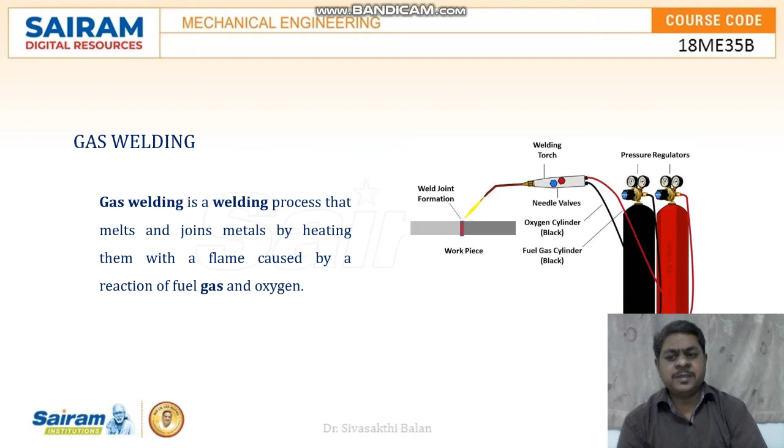In this video, we are going to see about the working principle of gas welding and its applications. Gas welding is a welding process that melts and joins metals by heating them with a flame caused by the reaction of fuel gas and oxygen.

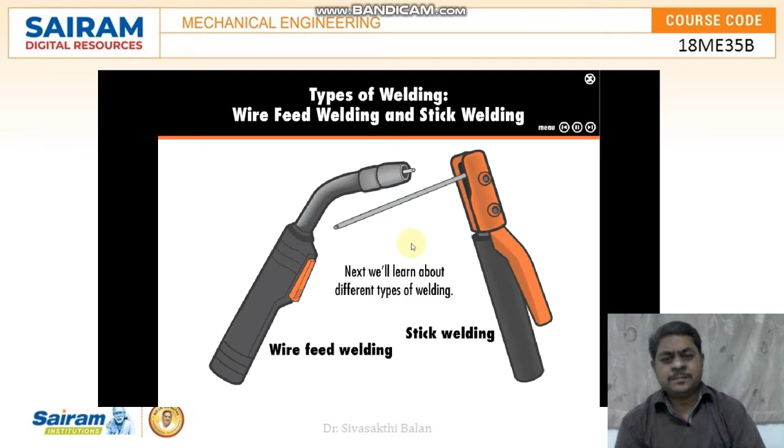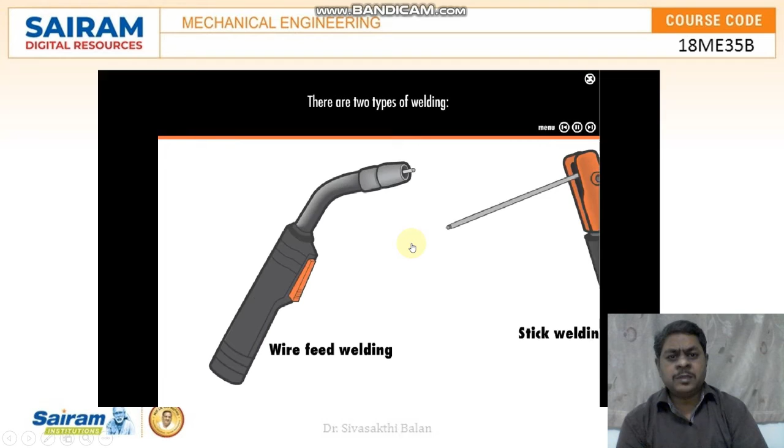Types of welding. Next, we will learn about different types of welding. The type of welding is defined by how the filler material is fed into the welding process. There are two types: wire feed welding and stick welding.

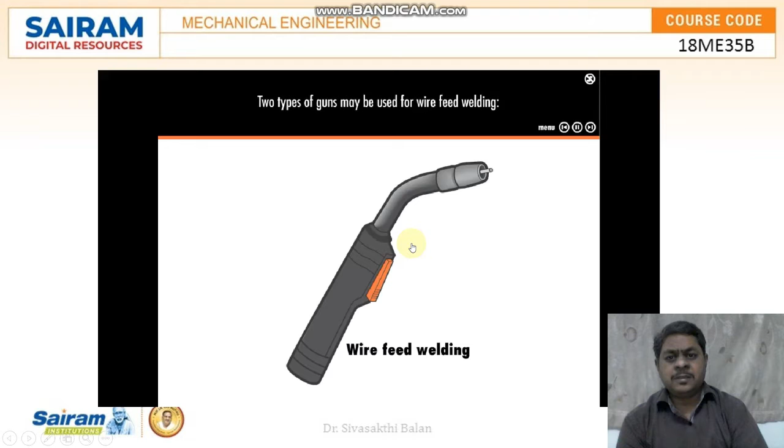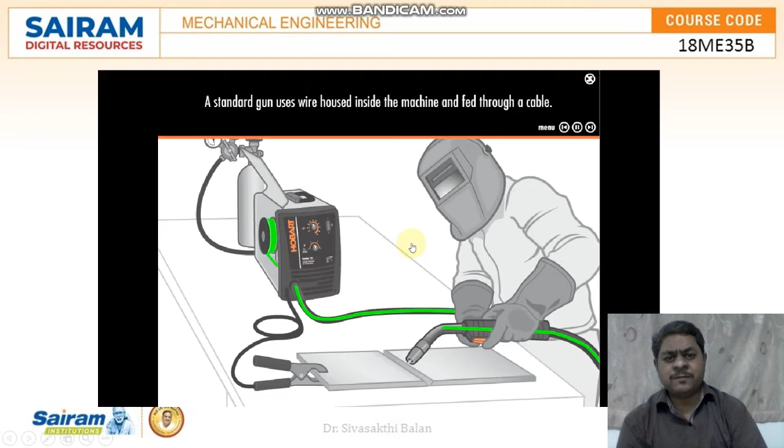Wire feed welding uses a gun to feed the wire into the welding area. Two types of guns may be used: a standard gun and a spool gun. A standard gun uses wire housed inside the machine and fed through the cable. A spool gun uses wire housed on the gun itself.

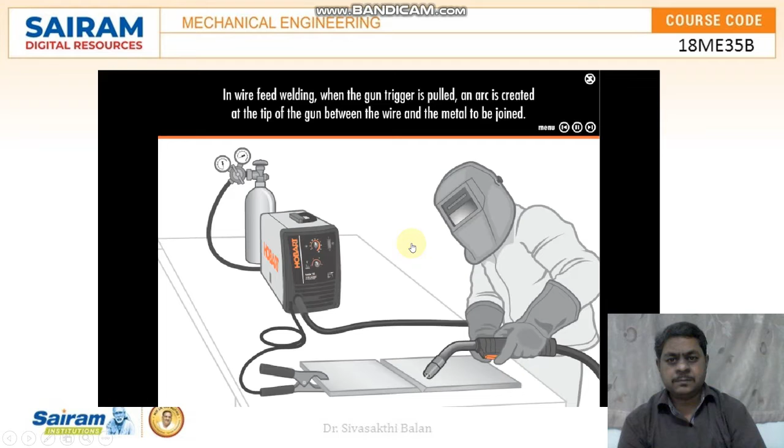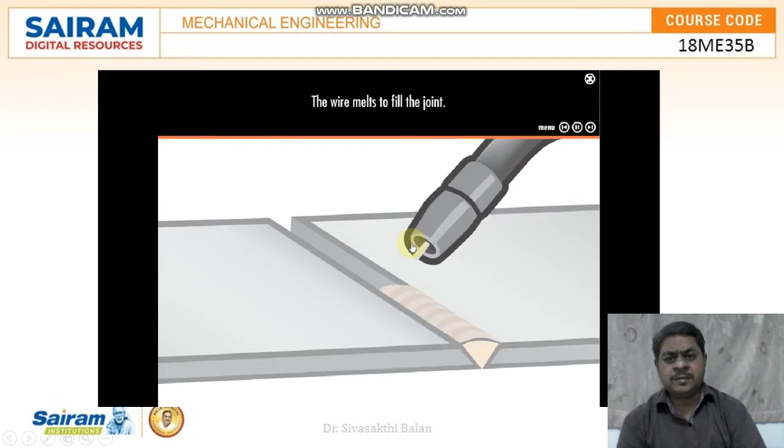In wire feed welding, when the gun trigger is pulled, an arc is created at the tip of the gun between the wire and the metal to be welded. The wire melts to fill the joint. Pulling the trigger releases more wire into the welding area.

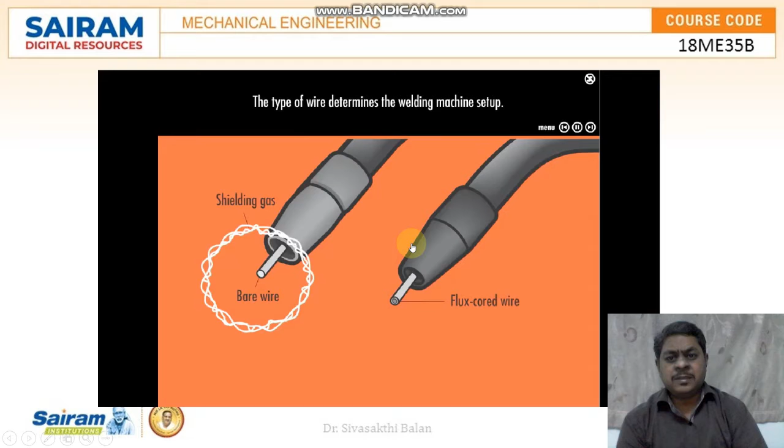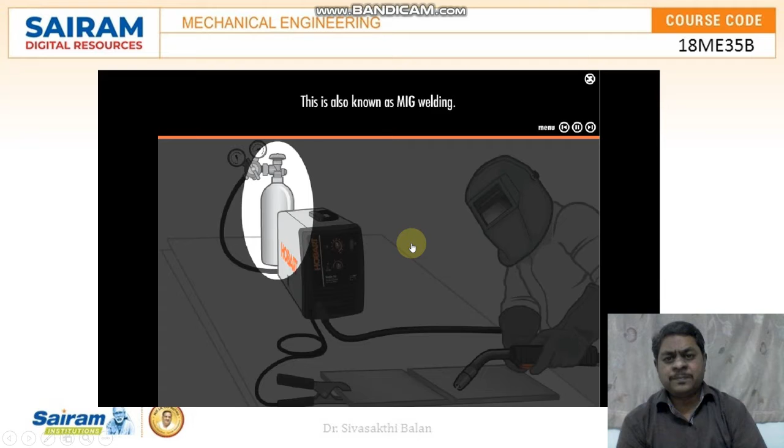The type of wire determines the welding machine setup. When solid wire is used, shielding gas from a gas cylinder connected to the machine is needed to protect the weld. This is also known as MIG welding. When flux core wire is used, a chemical inside the wire provides the shielding, so no additional shielding gas is needed. Besides wire feed welding, the other type of welding is called stick welding.

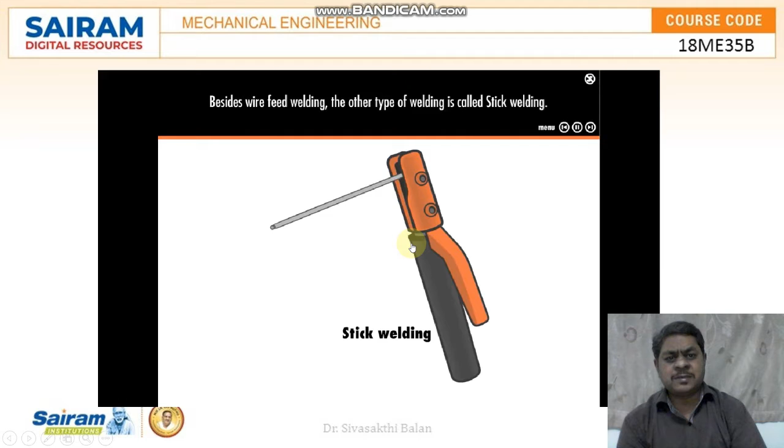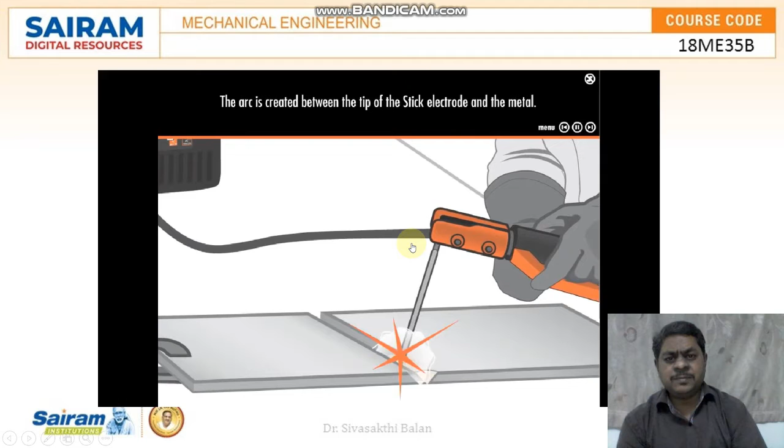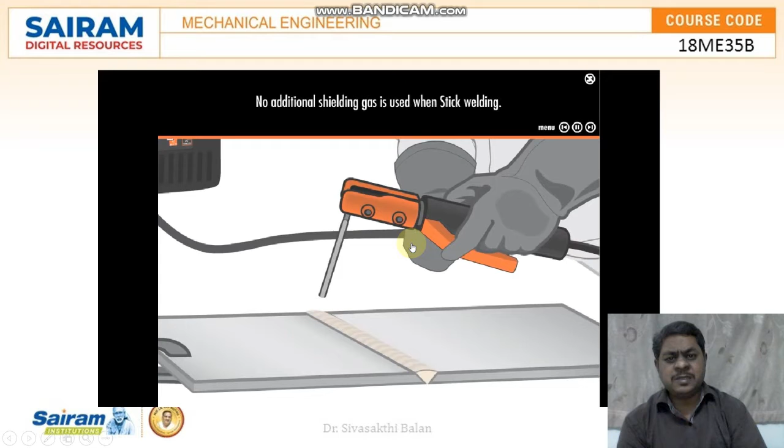Stick welding does not use a gun, rather a stick electrode placed in an electrode holder. The arc is created between the tip of the stick electrode and the metal. The electrode melts as it is fed into the weld area. No additional shielding gas is used when stick welding. The stick electrodes are coated with chemicals that are released when melted to create the shield.

The following video explains the working principle of gas welding.

Principle of gas welding. What is gas welding? Gas welding is one type of welding process in which the edges of the metal to be welded are melted using gas flame, and no pressure is applied during welding. The gas welding setup consists of a regulator, hose, oxygen control valve, acetylene control valve, acetylene cylinder, and oxygen cylinder.

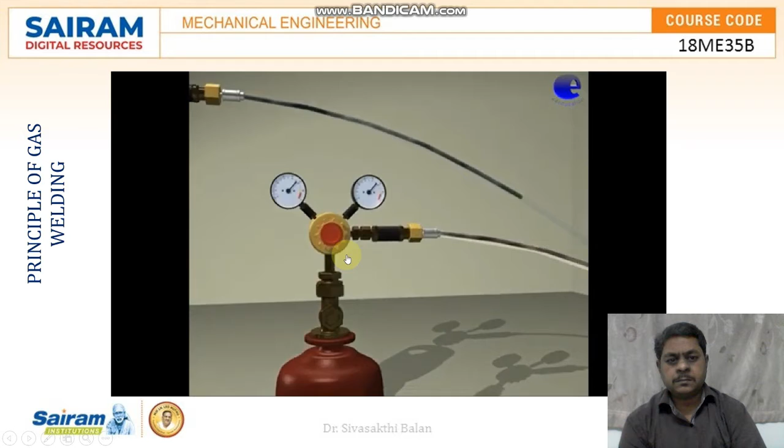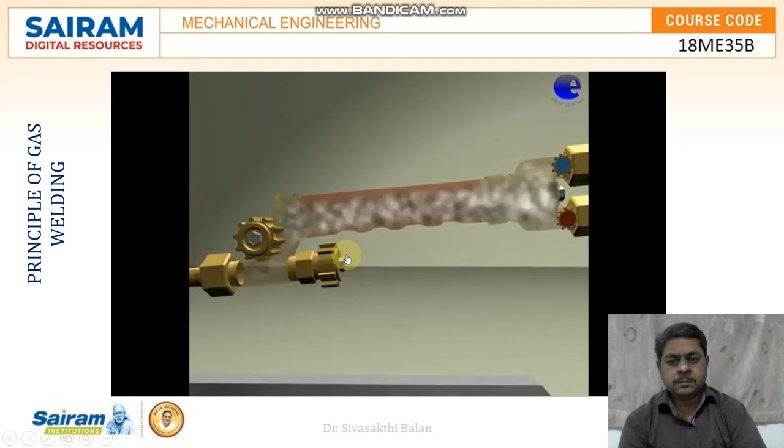Open the cylinder valves and pressure adjustment knob. Then check the correctness of pressure registered on the pressure gauges. Mixing of oxygen and acetylene forms oxyacetylene gas in a blowpipe, that is the torch. The flame is produced at the tip of the welding torch.

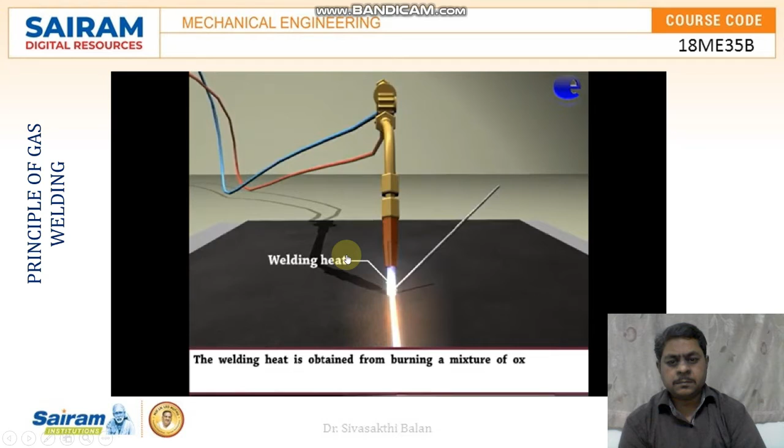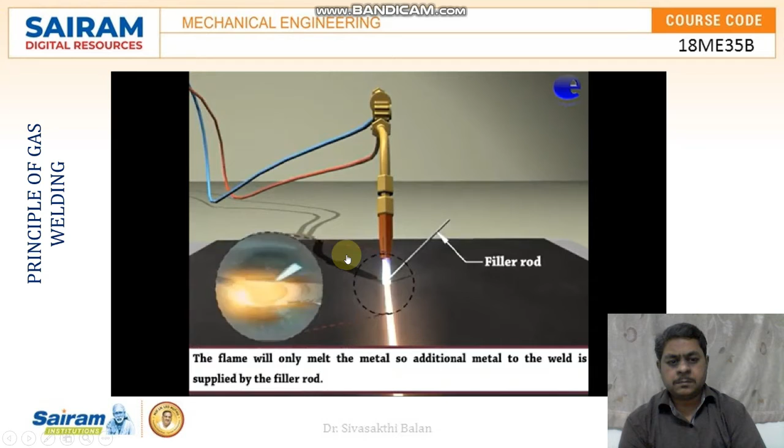The welding heat is obtained from burning a mixture of oxygen and a combustible gas. The flame will only melt the metal, so additional metal for the weld is supplied by the filler rod. Hence, both the pieces become a single piece.

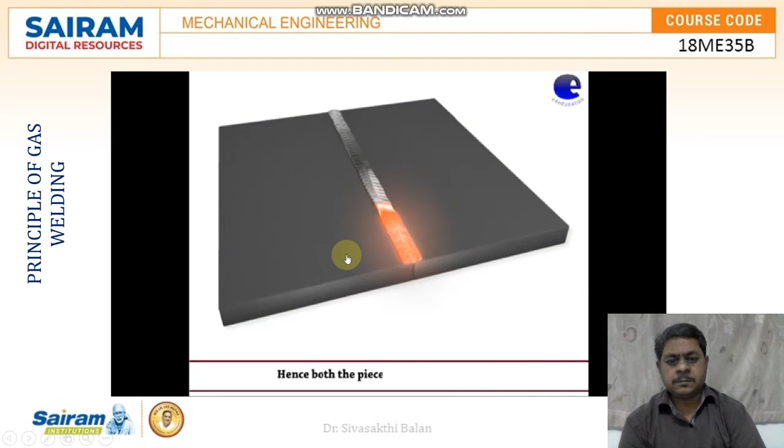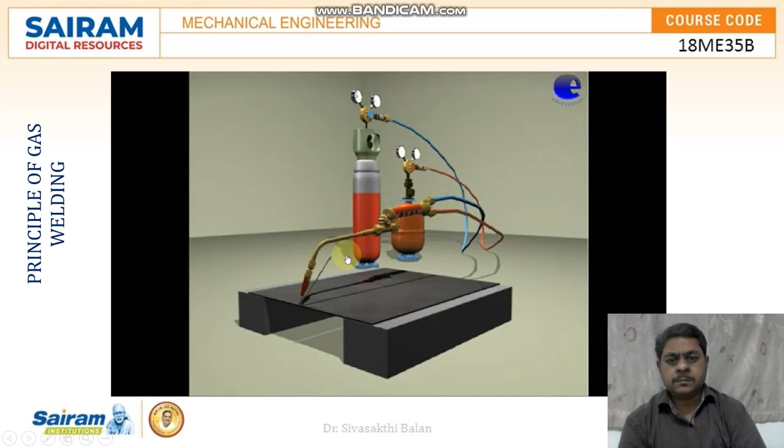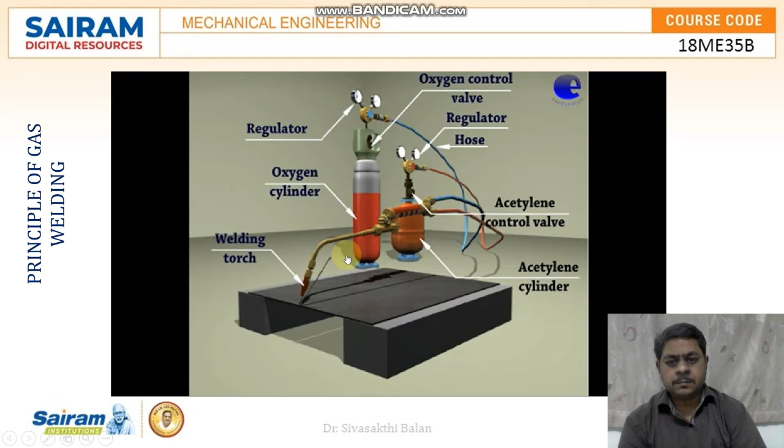Equipment used in oxyacetylene welding: regulator, oxygen control valve, acetylene control valve, oxygen cylinder, acetylene cylinder, hose, and welding torch. These are all the equipment commonly used in oxyacetylene welding.

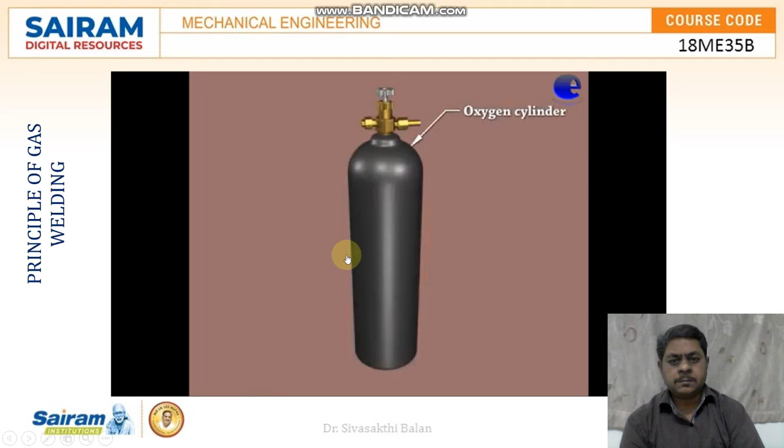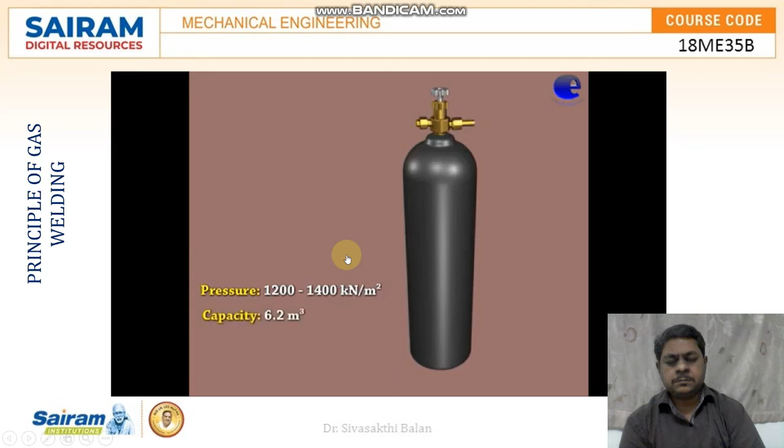Oxygen cylinder. We are going to see the specification of the oxygen cylinder. This is the 3D view of the oxygen cylinder. The standard color for the oxygen cylinder is black. Oxygen cylinders are usually filled at a pressure of 1200 to 1400 kilonewton per meter square and have a capacity of 6.2 meter cube. The oxygen cylinder weighs approximately 80 kg.

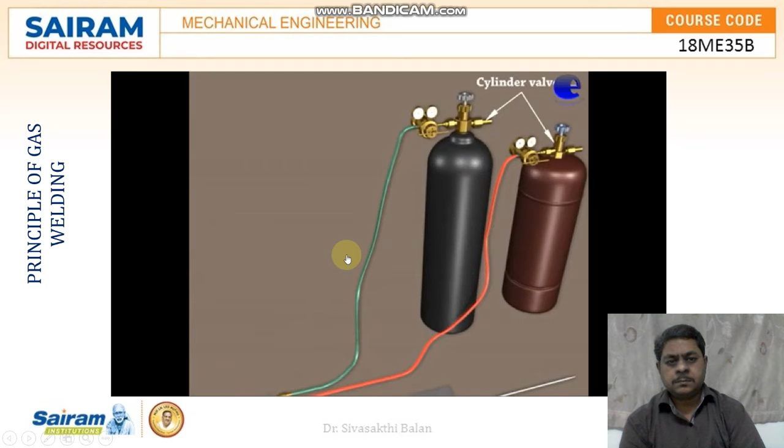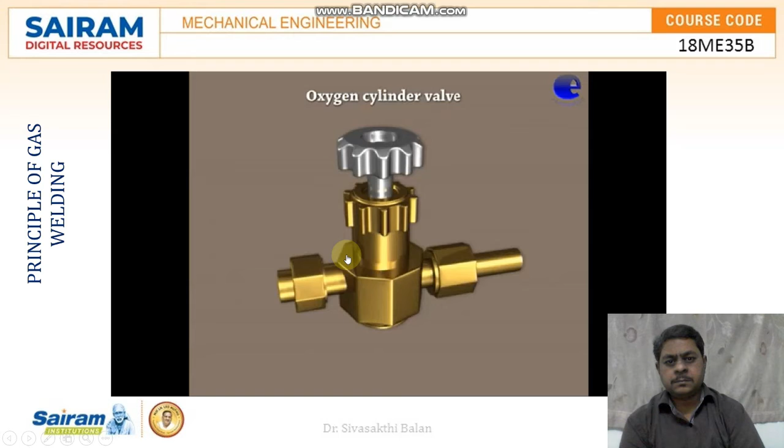Cylinder valves: oxygen cylinder, acetylene cylinder. Now we take a close look at the oxygen cylinder valve, taken from the oxygen cylinder. The cylinder valves are fitted at the top of the cylinders. The valve of the oxygen cylinder is made of brass. Valves fitted to cylinders have right-handed threads for the oxygen cylinder.

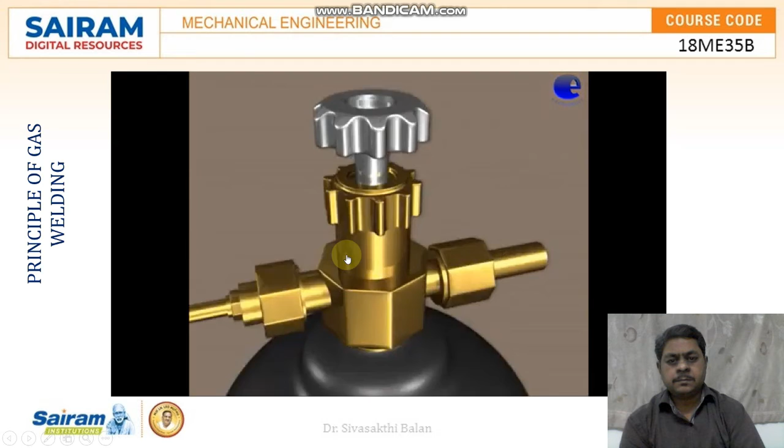Now we take a close look at the acetylene cylinder valve. The acetylene cylinder is made of steel. Valves fitted to cylinders have left-handed threads for the acetylene cylinder. The cylinder valves are used to block the compressed gas in the cylinder.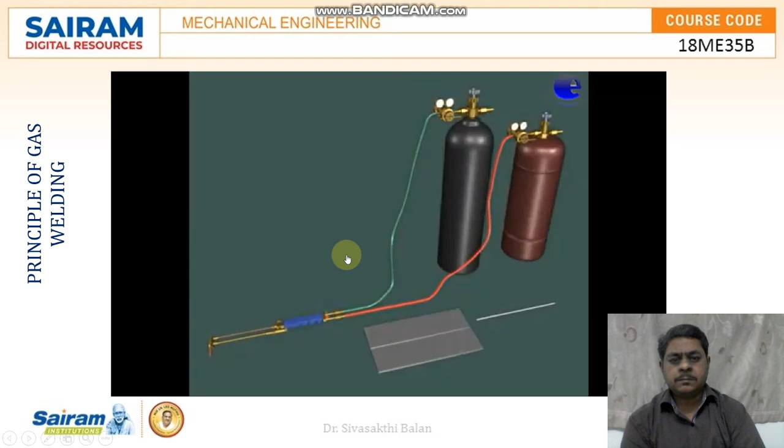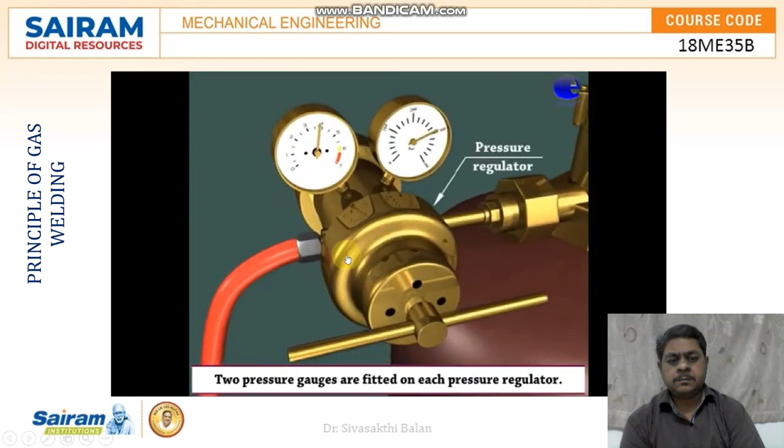Pressure regulator gauges. Now we are seeing a close look at the pressure gauge. Two pressure gauges are fitted on each pressure regulator. One pressure gauge shows the pressure inside the cylinder and the other shows the working pressure of the fuel gas and oxygen.

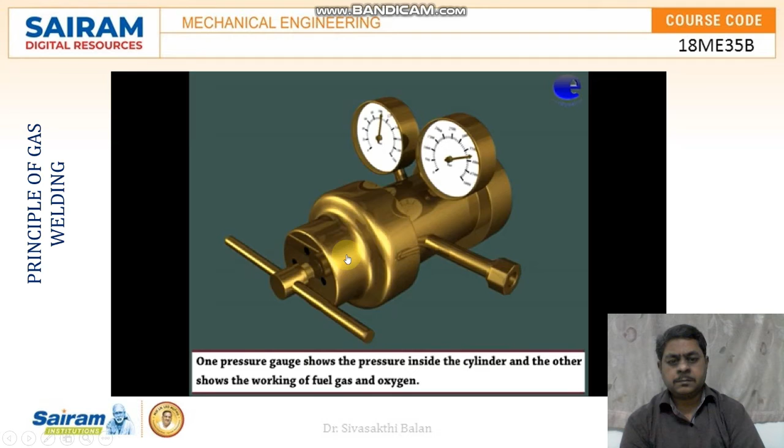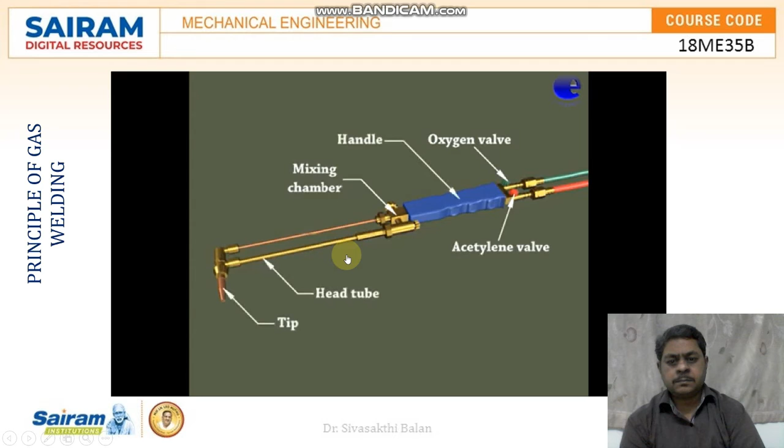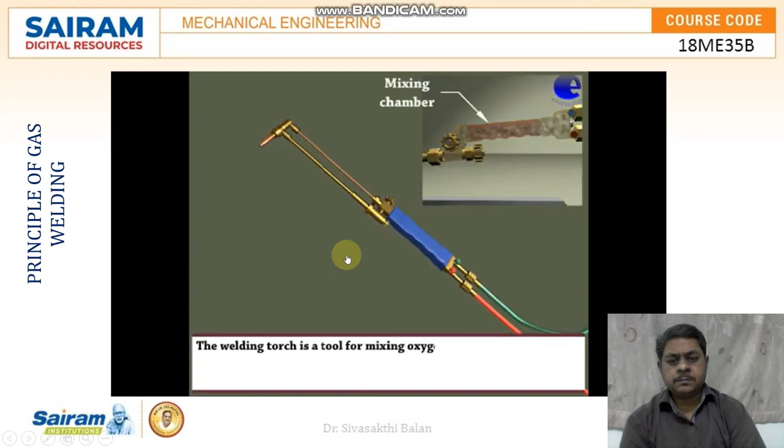Welding torch. The parts of the welding torch are as follows: oxygen valve, acetylene valve, mixing chamber, handle, head tube, and tip. What is a welding torch? The welding torch looks like a blowpipe. The welding torch is a tool for mixing oxygen and acetylene in correct proportions and burning the mixture at the end of a tip, which produces a high temperature flame.

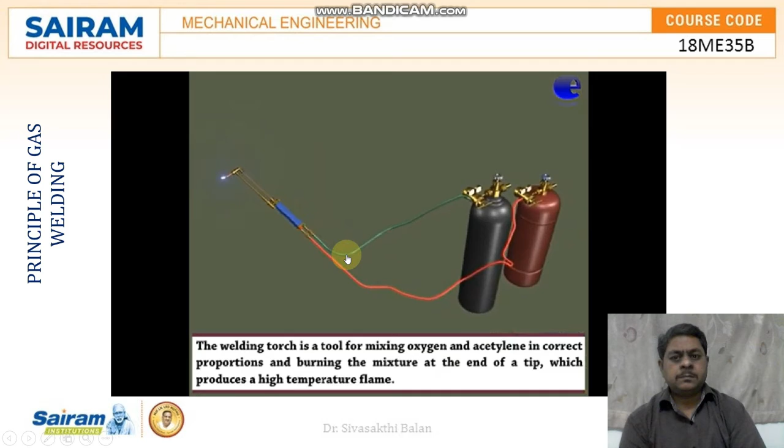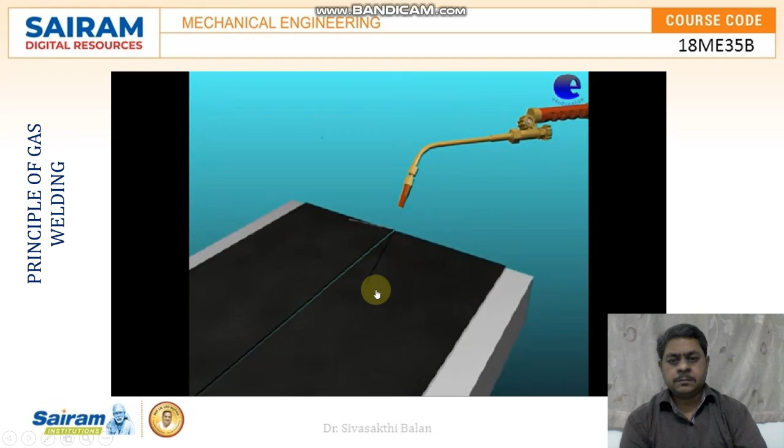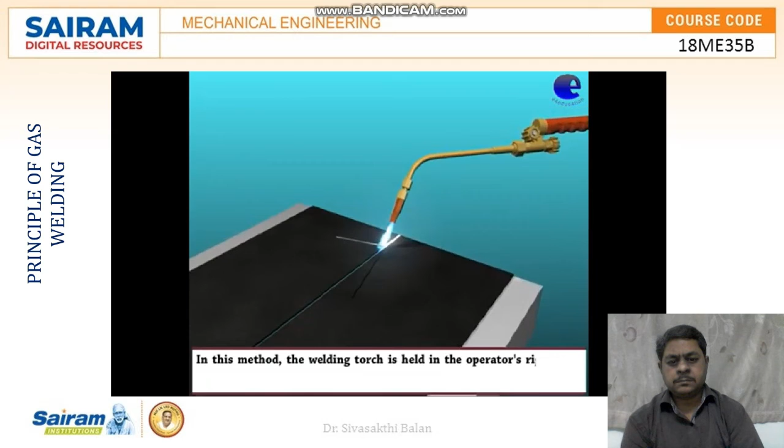Forward or leftward welding. Let us see the forward and leftward welding. This welding consists of a filler rod and welding torch. In this method, the welding torch is held in the operator's right hand and the welding rod in the left hand. Welding direction: in this welding, the torch flame moves from right to left.

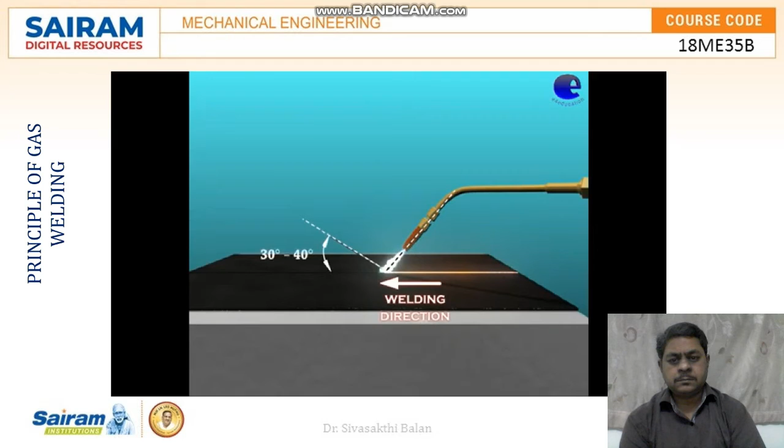The filler rod makes an angle of 30 to 40 degrees. The torch makes an angle of 60 to 70 degrees. This technique is suitable for MS plates up to 5 mm thick and also used for cast iron and non-ferrous metals.

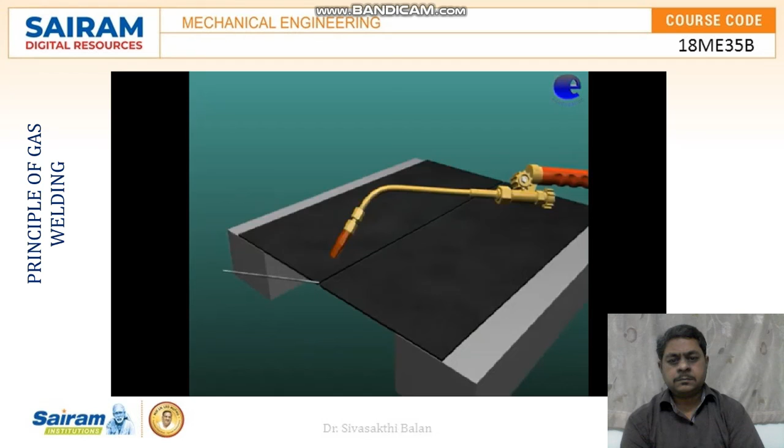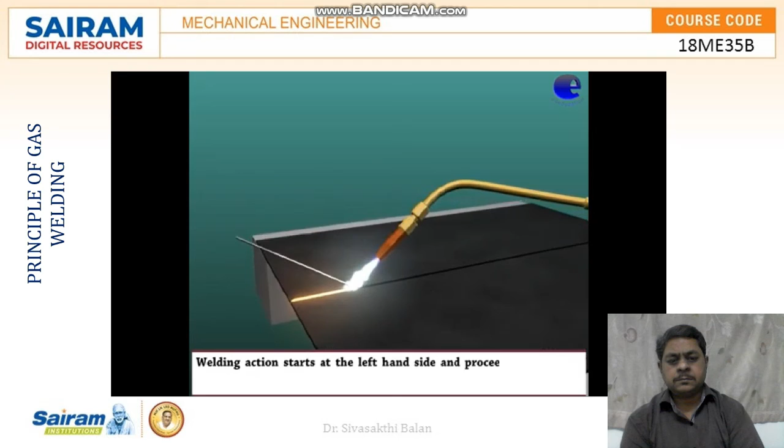Backward or rightward welding. The backward welding is one of the gas welding techniques. This welding consists of a filler rod and welding torch. Welding action starts at the left hand side and proceeds to the right hand side.

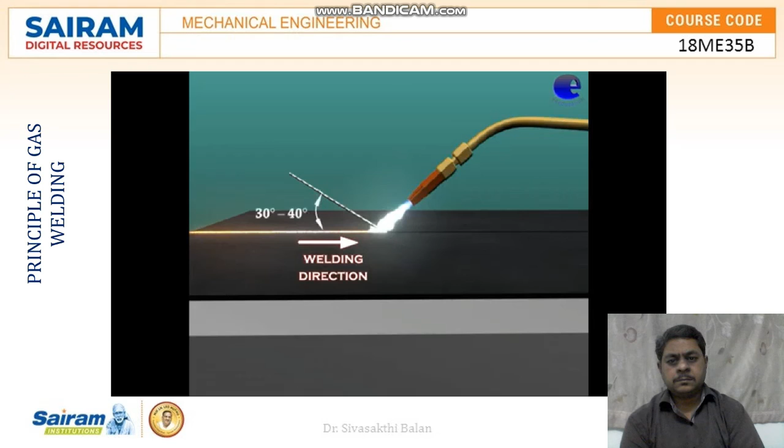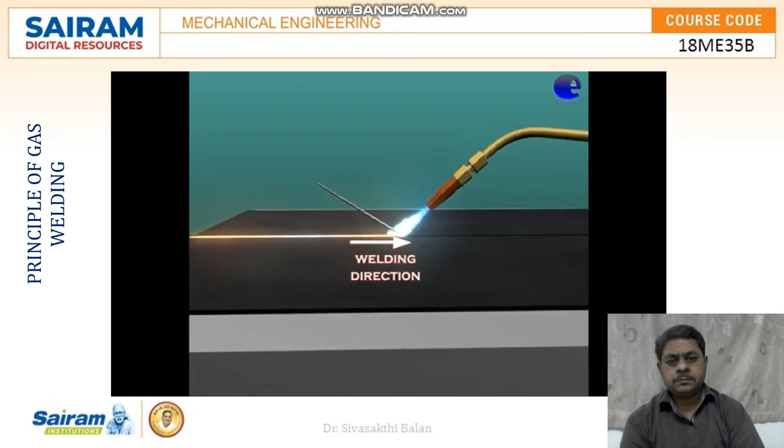Welding direction: in this welding, the torch flame moves from left to right. The filler rod is held in the left hand at an angle of 30 to 40 degrees. The torch is held in the right hand at an angle of 40 to 50 degrees. This method is better and economical for plates over 6 mm thickness.

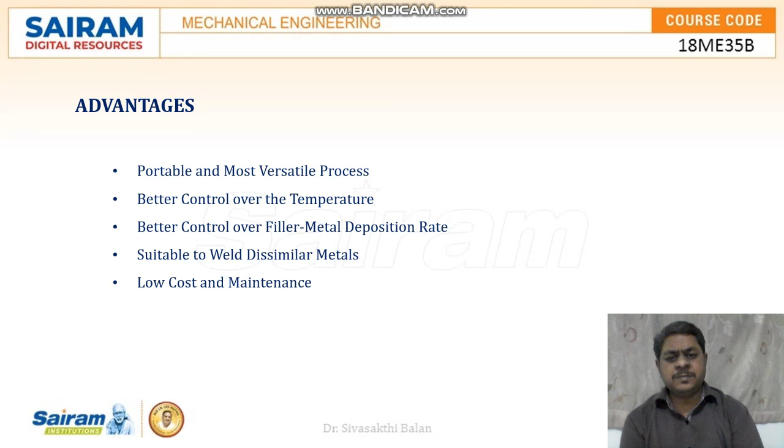Advantages of gas welding: it is portable and a most versatile process. It has better control over the temperature. It also has better control over the filler metal deposition rate. It is suitable to weld dissimilar metals, and it has low cost and maintenance.

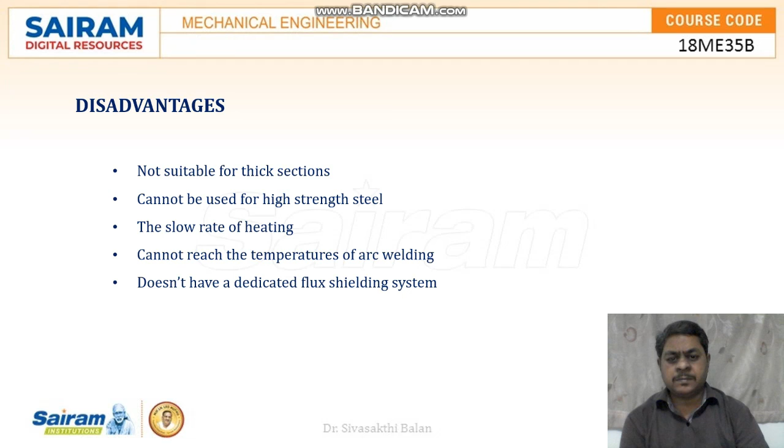Applications of gas welding: it is widely used for joining most ferrous and non-ferrous metals, carbon steels, alloy steels, cast iron, aluminium and its alloys, nickel, magnesium, copper and its alloys, etc. It is widely used in automotive, aircraft industries, and sheet metal fabrication industries.

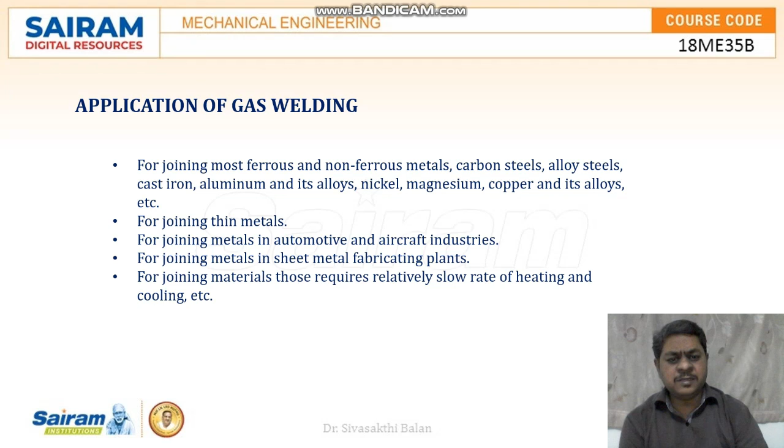It is used for joining materials that require a relatively slow rate of heating and cooling. Thank you.